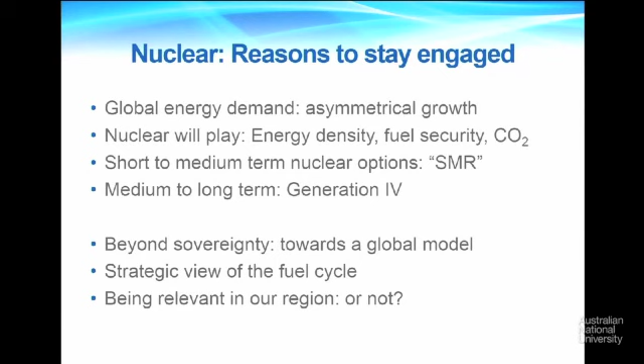Australia needs to take a strategic view of the fuel cycle. We're certainly at the front end of the fuel cycle with respect to uranium. Those of you who follow the various bits of nuclear news will have noted that Kazakhstan and China signed a cooperation agreement just this week saying that they're going to work together at the front end of the fuel cycle as well. And I think an underlying overall question is, are we going to be part of our region or not?

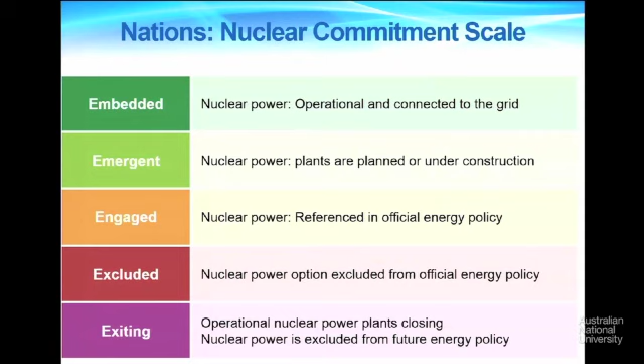So this is a scale that we use to look at the extent to which countries are involved in nuclear power. This particular typology, which was developed by some colleagues at ANSTO, has green as embedded, red is excluded. The nomenclature is sort of chosen to show a map of Asia, which is our region. And it's important to note now that you can get everywhere from Turkey right across, jump over North Korea all the way to Japan, and you can get right across the diagram now. There are various other ways to get across the diagram in terms of where countries are and their level of commitment to nuclear.

These are the specific commitments that we have in place at the moment. Japan is a bit of a wild card. We're not quite sure where that is going to land. But a country like Turkey has got a major nuclear program which is being developed initially by the Russians. Saudi Arabia is talking about a significant number of reactors. I spent some time in Jordan recently and had discussions with them at a senior level about their program.

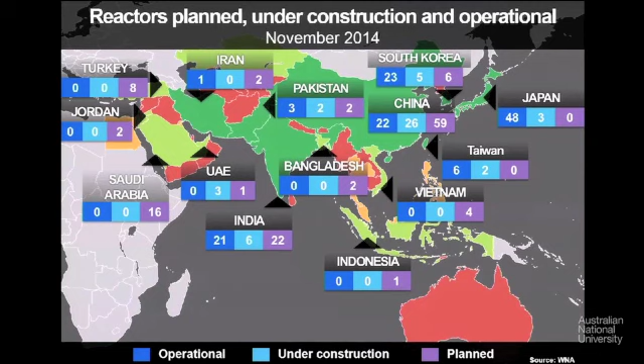And last week, or the week before last, we had the Forum for Nuclear Cooperation in Asia. The ministerial meeting took place in Sydney. And so we caught up with most of the other countries on this diagram in terms of where they are with their programs. So whatever happens in Australia, we certainly are going to be in a nuclear region, and a region which will be dominated by the adoption of nuclear technology increasingly over the next decades.

Why is this important? Well, this is from the ExxonMobil scenarios from 2013. You can see that if you're going to mitigate the fossil carbon-based sources, you're going to need renewables. Most people who are thinking about 80%, and I certainly live and dream the 80% mitigation of carbon, I don't think there's a rational pathway to 80% mitigation of carbon without having nuclear as part of the mix. I think it's impossible to achieve. Most of the modelling that I've seen out of the UK suggests at about 50% it gets really, really difficult if you don't have nuclear as part of the mix.

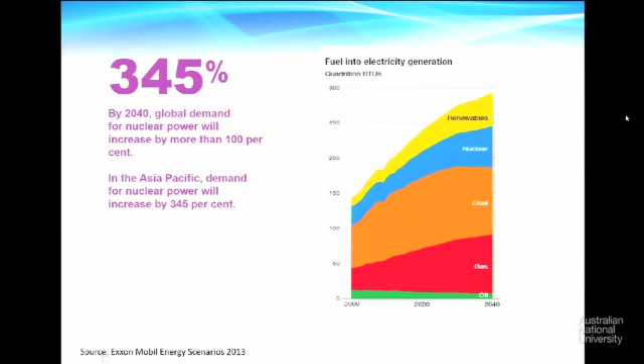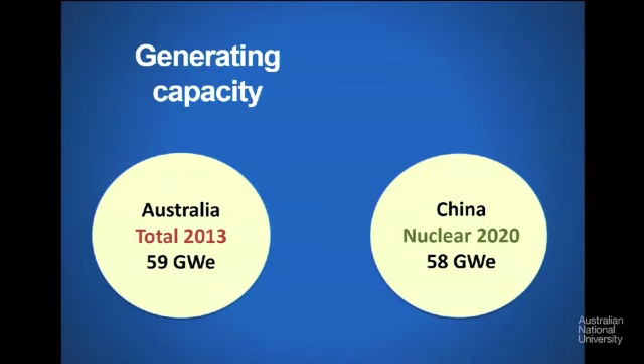So just if we look at China, for example, which has got a major build program at the moment, if China completes the build that it's currently got on by 2020, it will essentially only have as much nuclear as Australia's got electricity-based energy at the moment. So China, although it's building a very big program of nuclear reactors at the moment, it's having almost no impact on their carbon footprint. And remember that their nuclear capabilities will be significantly bigger than their renewable capabilities. Because that's the real China that we're looking at in terms of the capacity that has to be in there. Currently, this year, 1,146 gigawatts electrical, and still relatively energy poor in comparison to the United States and other OECD countries.

So I think the underestimate for me in many of the scenarios that I look at is the aspirational needs of people to escape from poverty, to get on a developmental pathway that is meaningful to them and allows them to fully participate in the global economy. When we start the debate there, you have to give people choices where they can build big plants that will sustain large numbers of people as they undergo the normal developmental phases of industrial growth.

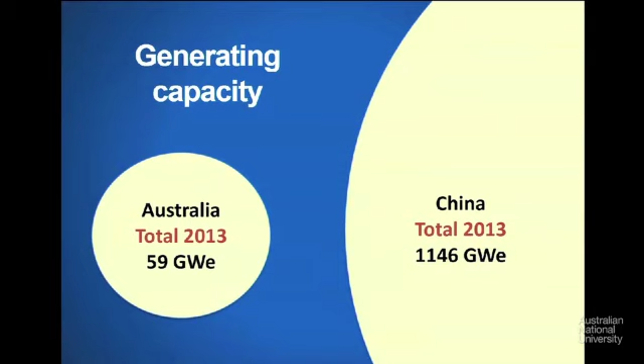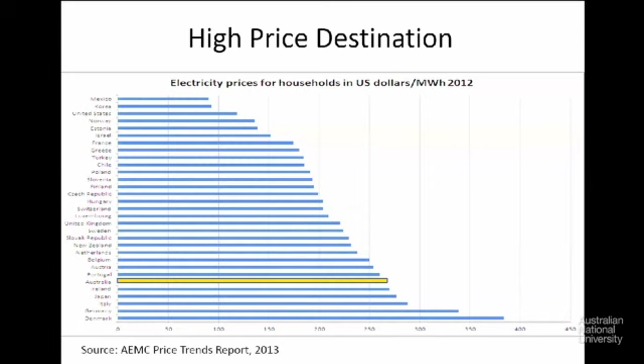So Australia, when I arrived here about 6 years ago, was, I think, number 3 at the top of this diagram. I think this 2013 figure is no longer accurate. What I don't understand from a policy perspective, and I haven't seen anybody write this up, is how do you get from the top of the diagram to the bottom of the diagram by having aging fossil plants that you're not replacing? It's a remarkable achievement, which we are experiencing in our pockets every day. And unless we understand the economics of how this mix is going to develop, I'm reckoning in 4 years' time we'll be north of Denmark. And Denmark needs Norway to bail out their renewables with decent hydropower.

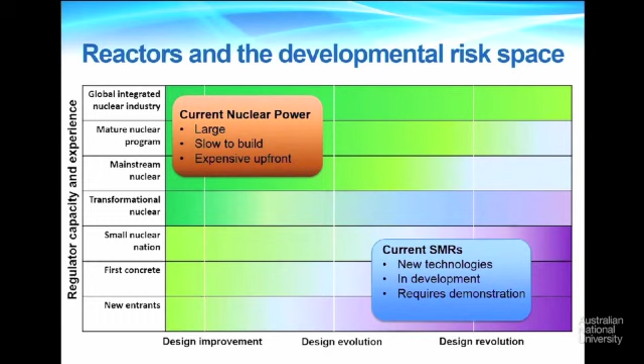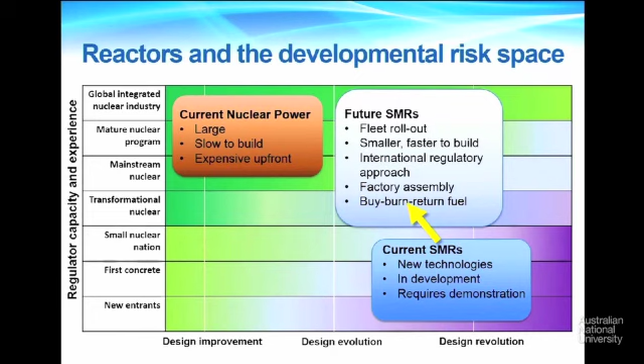A few are being built around the world. A couple of exciting projects in China, including a pebble bed modular reactor there. But in order for this to become sustainable and to roll out fleets of small modular reactors, because these are factory built, you want to build them in factories, you want to transport them easily, you want to put them in holes in the ground, they plug and play and they're all meant to work. We haven't seen that era yet, but that is what is being talked about for small modular reactors. And many of the countries that become involved will not want to maintain a fuel cycle for themselves. And so we have the buy, burn, return fuel cycle. Even more challenging are the Generation 4 reactors.

And one of the very difficult things to do is to follow the yellow arrow, which is to be a small country that doesn't have a nuclear tradition, a new entrant in other words, and to try to get a Gen 4 design that works and gets you up into that design evolution top corner, the green zone.

So I believe what we're going to see is the established players gradually globalize this industry, set standards for regulation, set standards for safety, set standards for fuel, set a whole lot of standards, and that global supply chain will then be designed to move into this area where the current nuclear power fleet is sitting. And as that's retired, the small modular reactors are going to come in.

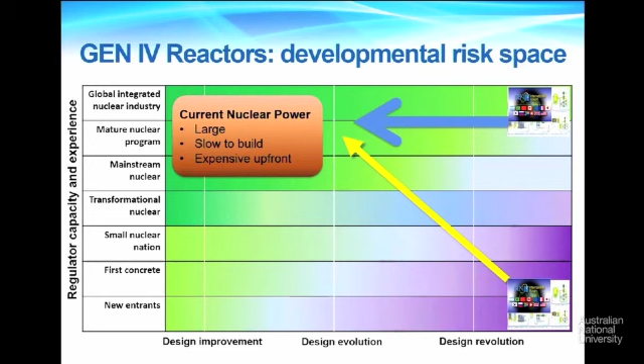So when you get your hands on this talk, this is just a sort of a typology that is meant to help you in making decisions about where you want to be and how you want to do it. It seems unfortunate to me that we've just restarted part of the debate in Australia, and there have been statements made, certainly over the last week.

I haven't heard the word social license yet, but it seems to me crucial that if we've learned anything in Australia about nuclear, we've learned about the need to have an informed public that is engaged early and where independent information builds trust. Familiarity and understanding correlates with public approval.

The UK is the first nation on earth to break the gender gap in understanding of nuclear, and we've seen over the last few years women and men in the UK start to agree about nuclear. In most of the rest of the world, there is a significant 15 to 20% gender gap in debates about nuclear. You can't have that and have a modern consensus-based approach to how we utilize our resources.

So there are reasons to stay involved. There's global energy demand, there's asymmetrical growth in our region. That's an opportunity for us. Nuclear will be part of that. It's impossible to get to 80% in meaningful ways for energy-poor countries without using nuclear as part of that mix.

In the short to medium term, nuclear options for many countries will be small modular reactors if we can get a genuine sovereign, post-sovereign approach. And in the medium to long term, Generation 4 reactors are going to become crucial. So I'm arguing that we should, over time, in a rational world, seeking energy solutions, particularly for the poor and the economically excluded, move beyond a model that's based on sovereignty towards a global model.

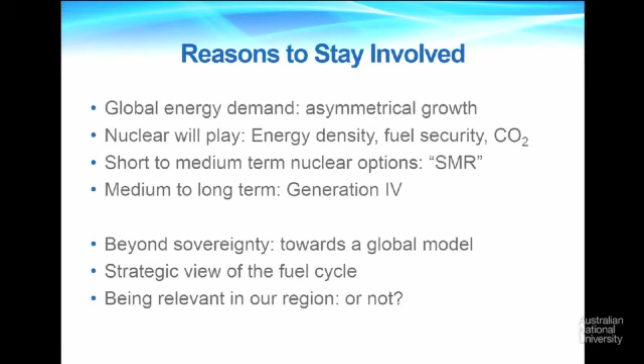Now, if we imagine what our future energy landscape is going to look like, a typical approach, one used by modellers such as those that do integrated assessments that build in models of the economy and energy growth, tend to start with some reference scenario and then consider how we may move from that business as usual reference scenario to some alternative, in this case ideally a low carbon alternative, one that meets particular carbon mitigation goals.

And I and a few others tend to refer to this as the layer cake approach, because it essentially takes the whole cake and then slices it up into different layers, all of which can contribute to that carbon mitigation. And that's a reasonable assumption to make, that we will have a mix of energy sources. That was something that Adi emphasised and Steven Chu emphasised in his talk, that we're not going to get there with any one particular energy source. And nuclear is in there as a wedge.

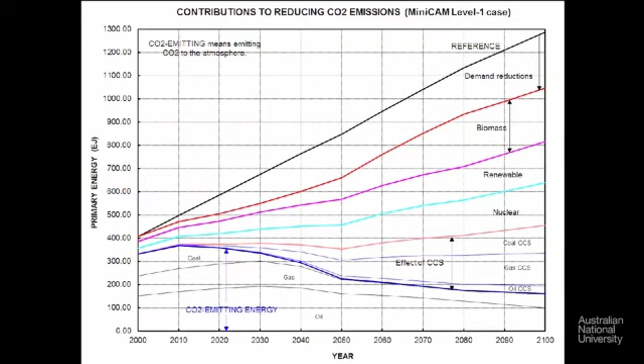So at the very least, I think you should accept that nuclear is going to be a wedge, and a wedge that fulfills certain roles that other energy sources can't. However, the history of energy in some countries suggests that it typically won't play out as a nice even layer cake. Some countries, such as France, for instance, when it moved away from about half fossil and half hydro, took a nuclear intensive approach. So in that case, the layer cake was mostly a soft filling in the middle of nuclear with a layer of other things around the outside.

Other countries may take different routes, and that's fine. Australia may or may not take a route like this, but we know that this is a viable route. A country has done it. And we know from the past that countries have typically all taken a similar route, which is a nice fat layer of coal. And that's something that we definitely want to avoid in the future.

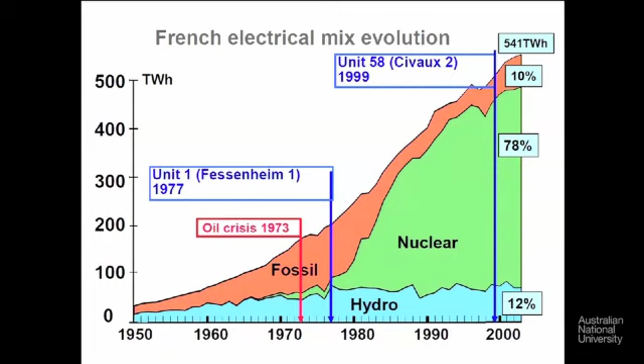The whole integrated energy system will require a massive expansion, even with continued pursuit of energy efficiency and conservation. There are so many roles that electricity and other new energy sources have to displace that we're going to need a lot more energy. And of course, in many countries that are energy poor, that growth is going to come just to catch up with where many of the OECD countries are.

So in that scenario, for instance, I looked at, it wasn't a prediction, it was a scenario where I said, what if by 2060, so about 50 years in the future, we could eliminate our dependence on traditional fossil fuels? What might the mix look like? And in this case, the scenario had the largest amount of growth in terms of relative growth year in, year out assigned to wind and solar.

So a 50-fold increase in wind and solar compared to our capacity today, and a smaller percentage increase in nuclear, 15-fold increase, and then some growth in hydro and biomass and potentially a wedge of fossil fuels with carbon capture and storage. So even taking the extremely optimistic line for renewables and saying a 50-fold increase, and a more conservative line for nuclear, given that it has a larger installed base, of 15 times, we still end up with about half of that supply coming from nuclear in that case.

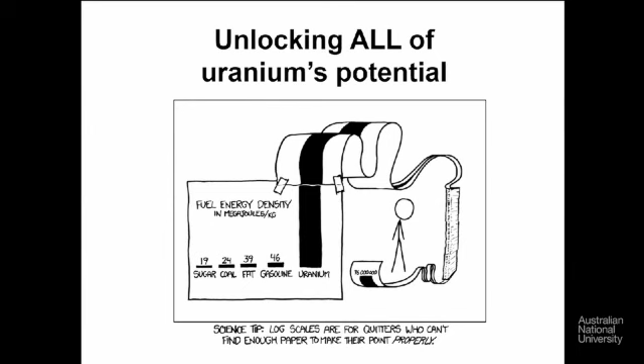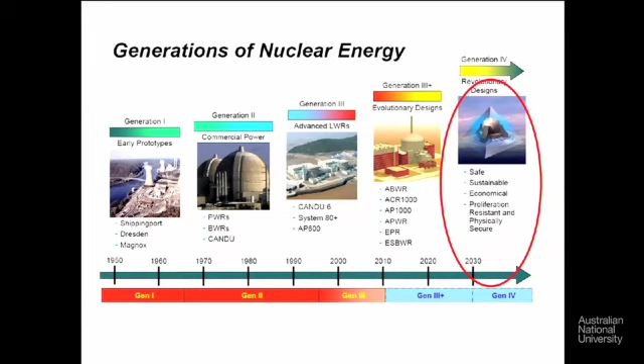So nuclear technologies continue to evolve over many decades. I'm talking about the next generation, which is not really an incremental evolution, it's a revolution in terms of how the systems operate in terms of safety and recycling of fuel and so on. Now, it's not just an idea. It is a reality. It has been practically demonstrated.

The largest single research and development investment in the United States in non-fossil fuel energy has gone into this technology, this integral fast reactor technology and related liquid metal fast reactors. And so it's actually a well-developed concept that most of the stages have been proven out and developed to a stage where it's a very reliable technology.

The part of it which still requires the final scaling is the electro-refining of the spent fuel. But that's a really critical step that's now being worked on. It's been demonstrated at the laboratory scale, not at the commercial scale. But it's a key step in closing this fuel cycle.

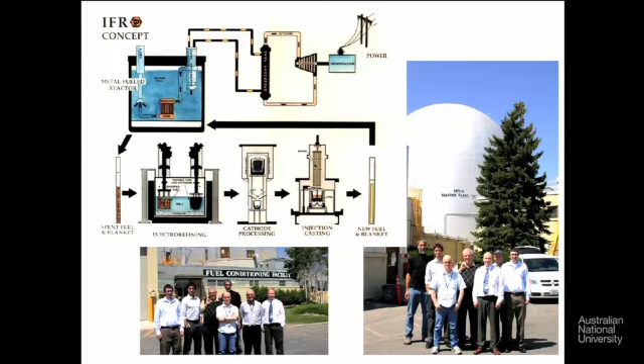If you're interested in how that American technology was developed from about 1964 through to the end of the 20th century, then I would encourage you to read this book that was written a few years ago. It also tells a good narrative about American energy policy in general. It's called Plentiful Energy, and it was written by a couple of scientists and engineers who were involved in the development of this program. Fascinating read.

But my vision of that type of nuclear technology is that we have a fuel cycle which doesn't just move through the chain once and then is left with the problem of what you do with spent fuel at the end. So that's the top part of that slide. I'm not sure whether we can see that. No. It's the top part of that slide. Here we are. That's a traditional fuel cycle.

You mine the uranium, you enrich it, you run it through a light water reactor, you generate lots of low carbon electricity, but then you have spent fuel that has to be stored for potentially hundreds of thousands of years in an isolated geological repository. The alternative is that you take that spent fuel that already exists and you manufacture it into fast reactor fuel, recycle it many times in a fuel recycling centre.

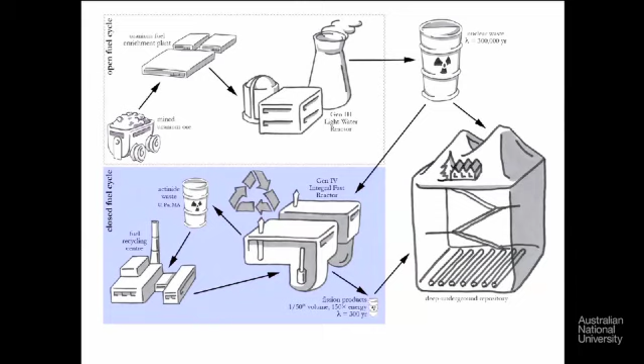What eventually comes out then is stripped of all of the long-lived radioactive waste, and all it has is the short-lived fission products, which have a much shorter lifespan. So they still go into the repository or some other engineered facility, but not for 300,000 years, more like 300 years. So we move from this philosophical problem of how you manage waste for 100 times longer than modern civilization to one which is an engineering problem of how you manage it for a few centuries and potentially recover the valuable products.

And the two really major advantages of this are, one is that you cut this radioactive lifespan by orders of magnitude. And the second is that you take what is currently a waste product, which is spent nuclear fuel from today's reactors, and you turn it into abundant low carbon energy. If you fully recycle that fuel, you get about 150 times more energy out of that fuel than you would otherwise get. So that means that you've got all of this abundant, already available, zero carbon fuel. And you've solved your long-lived nuclear waste problem.

It's a very attractive proposition, and I think it's the type of new technology, the sort of breakthrough technology that we ought to be investing in, because it solves many entrenched sustainability problems and potentially provides a major solution to decarbonising our economy.

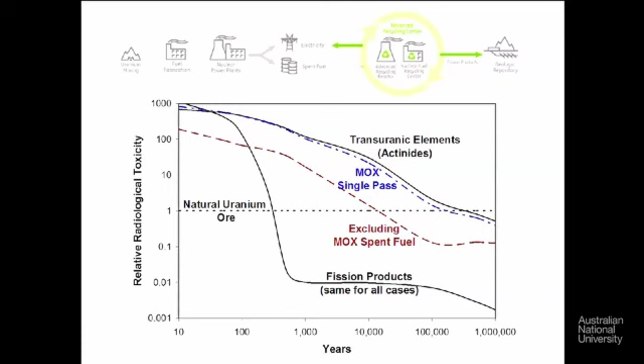And just to put that in perspective, if you were to do it with natural gas, compressed natural gas, you would require around 58 natural gas tankers for each and every one of us in here. If you were to do it with coal, you would require the amount of coal equal to an elephant, and then you multiply that by 800 times, so 800 elephants, about 3,000 tonnes of coal for each and every one of us here, so that's a large amount of coal.

And if you were to store it in currently commercialised nickel metal hydride batteries that are used in, say, a Prius car today, then you would require a battery the size of an elevator shaft, and that elevator shaft would be 13 times taller than the elevator shaft of the Burj Khalifa building, which is currently the tallest skyscraper. So a lot of materials go into that.

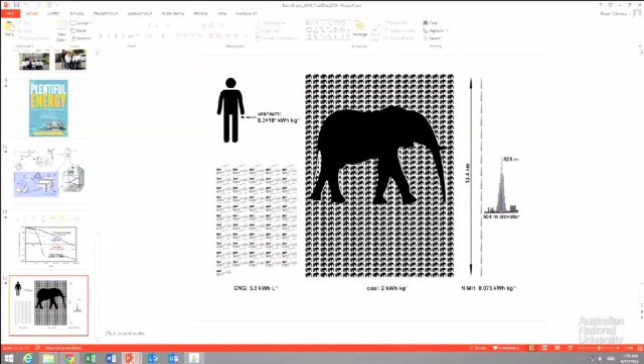Thanks, Chairman. I agree with some of the things that Barry and Adi have said, and I disagree with others. I'm going to talk about the question of what future there is for nuclear energy, but I wanted to contextualise that by making some comments about the World Energy Outlook 2014 paper. I don't want to pour too much water on the pitch that our guest has to bat on this afternoon, but I did want to make a couple of qualifying comments about that because there are some things about that that do worry me.

40 years ago, Limits to Growth was published and said that if the growth trends in population, resource use, industrial production, agricultural output and pollution were all to continue, we would reach limits within 100 years, and the most likely result would be economic and ecological collapse in the middle decades of this century. Dr. Graham Turner of CSIRO has done a comparison of the standard run of the Limits to Growth model with 40 years of data, and we are right on track for that gloomy outcome. Now, of course, that may be a policy objective for this generation of leaders, but it's not one I think they would like to be remembered for.

And just in case you think that it's only scientists and modellers who are saying that, the World Economic Forum, which is basically the big end of town at a global level, said at the end of their summit on the global agenda in 2008 that the recent crises of fuel, food and finance are the canaries in the mine, the early warning signals that our current economic system is simply not sustainable in the sense that you cannot have unlimited growth in resource use in a closed system.

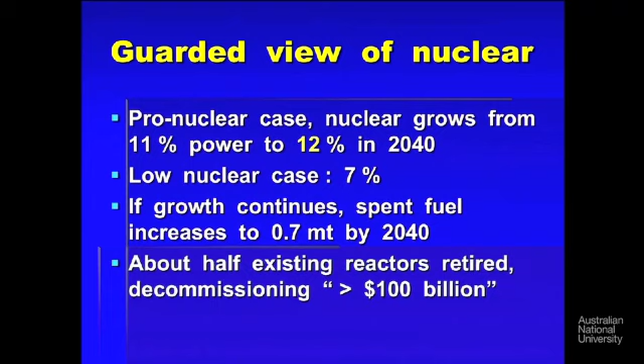Underlying a lot of the discussion about nuclear power is what's been called the deficit model. Those who advocate it implicitly say that we are wise technical experts who support nuclear energy. Those who oppose it are ignorant. If only the community were well educated, they would see reason and accept nuclear power, and we must therefore educate the community. I think there's some problems with that approach.

The first is that not all technical experts support nuclear energy, and the second is that not all the technically ignorant oppose nuclear energy, as a couple of government ministers have recently demonstrated. In fact, there's no hard evidence of a correlation between technical education and support for or opposition to any particular technology, either solar or nuclear.

I think we have to be aware of what's been called the May effect. Lord Robert May gave a paper to the UNESCO World Conference on Science in 1999, pointing out that the scepticism about advanced technologies, like integrated fast reactors and genetically modified food crops, is actually higher in countries that are well educated scientifically. And his explanation is that only the scientifically naive believe assurances that a technical advance will be an unmitigated good.

And he said those who understand the technology appreciate that there is always a trade-off. There are always risks as well as benefits. And he said we shouldn't be surprised that a more educated community is more critical. So educating the community to understand nuclear power better might actually make them more hostile rather than more positive.

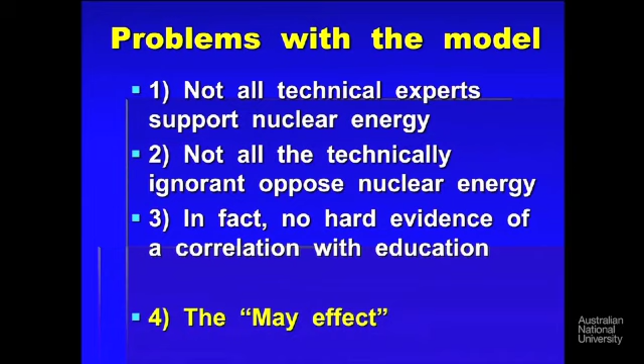And I'd remind you also that educate is one of those irregular constructions. I educate, you persuade, he brainwashes. That one person's education is another person's propaganda.

What are the concerns? Well, I think the concerns of the community broadly are that nuclear power, for Australia anyway, is too expensive, too slow, makes too little difference, and there are the continuing problems of operating risk, management of waste, and ensuring that fissile material isn't misused. The Switkowski report was produced by, as John Clark put it, an independent group of people who want nuclear power by Tuesday. Whether that's accurate or not, they certainly couldn't be accused of being biased against nuclear power.

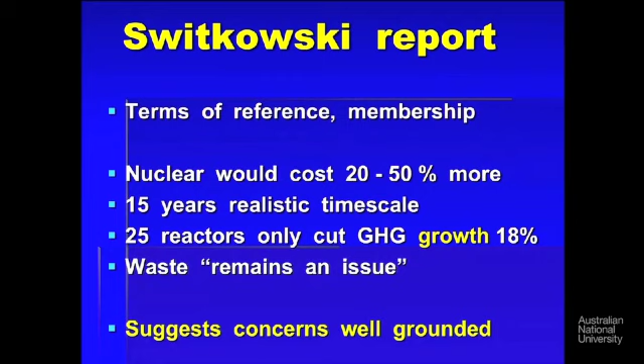And their conclusion is that nuclear in Australia would cost 20 to 50% more than alternatives. 15 years would be a realistic time to build one reactor. And a crash program of 25 reactors would not cut our greenhouse gas emissions, but only reduce the growth in our greenhouse gas emissions by 18%. And they said waste remains an issue. I think that suggests that the concerns are well grounded.

And the AMP Capital Investors report said that until there is a proven solution for waste management, the industry is transferring the risks, cost and responsibility to future generations. That unless there is a program of waste management or waste use or reprocessing that the community accepts, it's unlikely to be accepted.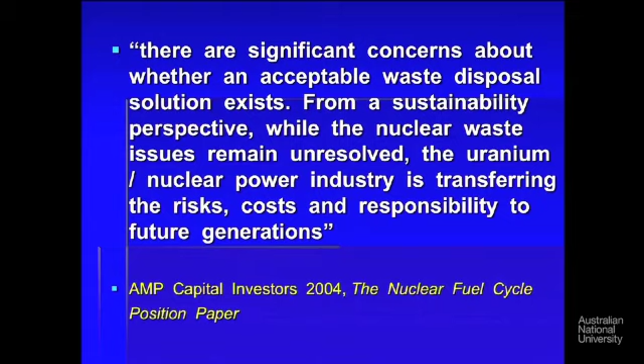In terms of the risk to communities, I suppose after well-publicised accidents, it's understandable that there are concerns. And the concerns, I think, revolve around the fact that we don't understand Earth systems well enough to be confident that anywhere is a secure site, proof against the worst that nature can throw at us.

Just as a personal example, I was sitting in Coffee Culture in High Street, Christchurch, at lunchtime on February the 22nd, 2011, having ordered a flat white and a toasted panini, blissfully unaware that where I was sitting was actually a dangerous place. It didn't look like this after the first tremor, after which I escaped. I was 200 yards away when the first aftershock reduced it to a pile of rubble. But the point is that Fukushima was overwhelmed by a tsunami that was much worse than predicted and much worse than the precautions that had been taken.

And we need to be aware that we simply don't understand natural systems well enough to be completely confident. I think, as Fukushima reminded us, nuclear demands a strong and independent regulatory approach. And I noted this recent comment by President Xi Jinping, who was unashamedly bullish about nuclear power, and he said it has a bright future, but without proper safeguards, such a bright future will be overshadowed by dark clouds or even ruined by resulting disasters.

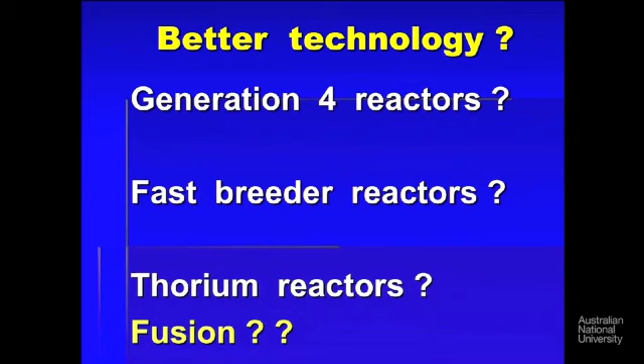I think we should certainly be working on better technology if we envisage nuclear being part of the solution. It may be that we can get Generation 4 reactors or integral fast breeder reactors to work at a level that may attain community acceptance. Thorium may also be possible, and I'm sure we're going to be told that fusion is no longer 50 years away, but perhaps only 30 or 40. And of course, if fusion could be made to work, that removes almost all of the problems that are entailed with fission.

Just a final obvious qualification, every country has a unique situation in terms of energy needs, resources, technical and regulatory capacity. No blanket assertion applies to all, but I think given that we have relatively large land areas and relatively small populations, Australia and New Zealand are especially well placed to use renewable energy technologies, which is why there's been such a rapid expansion despite governments being out to lunch on the issue.

So finally, I think real community concerns will not be allayed by bald assertions, and we need to recognise that values are critical in assessing technologies, which is why there is no one answer which everyone will accept. I think it's clear that both cost curves and community attitudes are favouring renewables at the moment. And I think the question that has to be answered is, if renewables can meet our needs, why would we expand nuclear power? Thank you very much.

Thanks, Ian. So now we'll welcome Steve Cowley to make his presentation. It's delightful to be here. Thank you very much. This is on, so I don't have to worry about it.

I'm not going to show any slides because tomorrow I'm going to give a scientific presentation of where we are on fusion. And what I'm going to talk about is part of the rest of my role somewhat in the UK and where fusion fits into that, in that I am responsible in some sense for some of the issues of what our nuclear future in the UK might be. I think this might be useful to an Australian audience, not perhaps as useful as what Australia should do, which I have no opinion on.